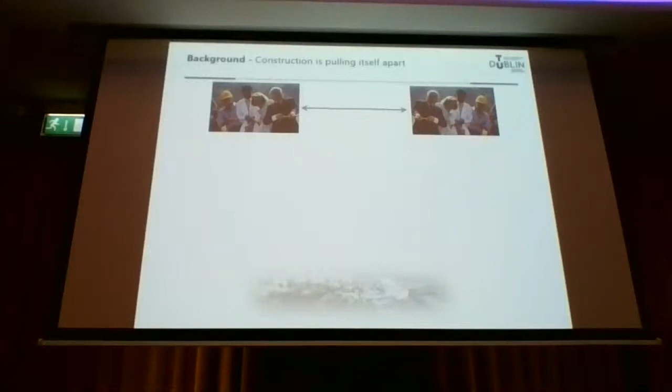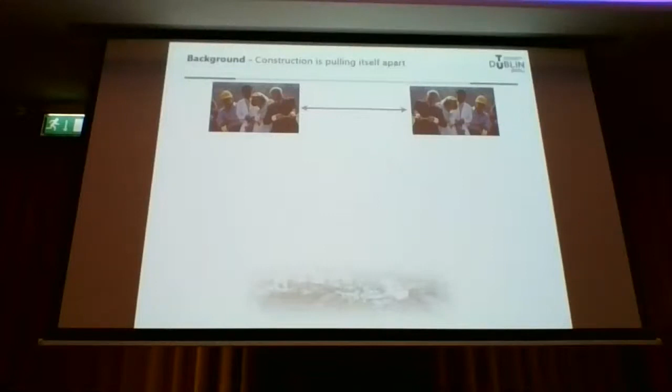So, just go through this. The first thing I would say is that construction generally has this idea, or we have this idea in construction, that it's pulling itself apart. I saw a slide last week of a number of people in a boat, and the people at the front were rowing in one direction and the people in the back were rowing in the other direction. But again, we have this with the tug of war, that it seems to be we're pulling in different directions.

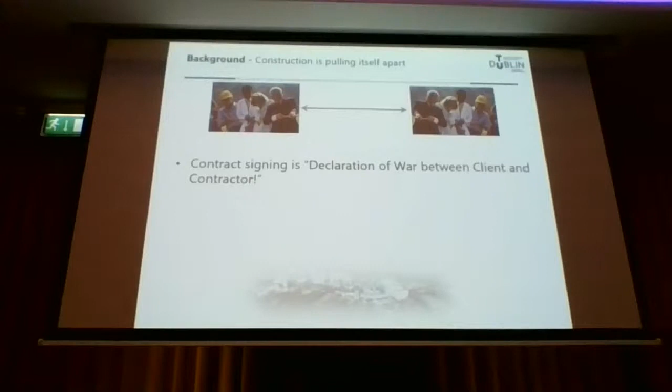And Wolfgang Breyer, who was mentioned by David Mosey earlier from Germany, has described, he's a legal person in Germany, he has described the contract signing as the declaration of war between the client and the contractor. And he said it often starts like that and it doesn't improve. And he said that's the environment that we then try to deliver our infrastructure within. So it's not a great place to start.

And part of the problem about this is that we concentrate on the contractual process rather than on the product itself. So we are always going through why we have to do things in a certain way rather than what we're producing. And I had a 30-minute discussion yesterday with somebody from a government procurement agency who I won't name.

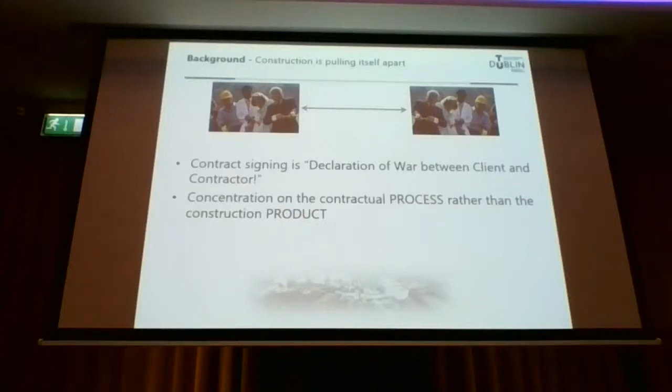It was the NDFA, who spent quite a bit of time talking about something that we couldn't do from the point of view of risk. And yet, when we looked at the issue that we were trying to solve, there was no risk. It's just they didn't want to do it because the process involved going through looking at all this risk and trying to analyse what the risk was. But yet when you looked at it, it was really a bag of smoke and there was nothing in there.

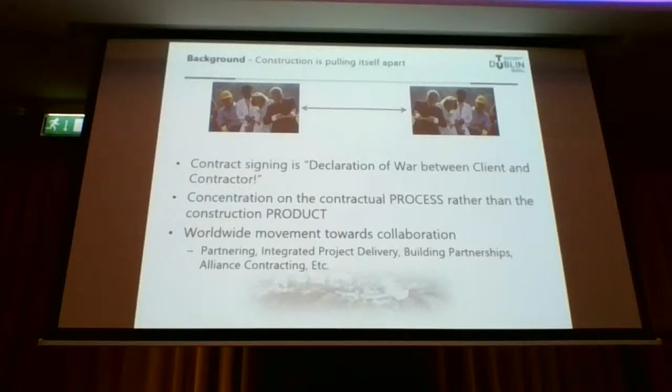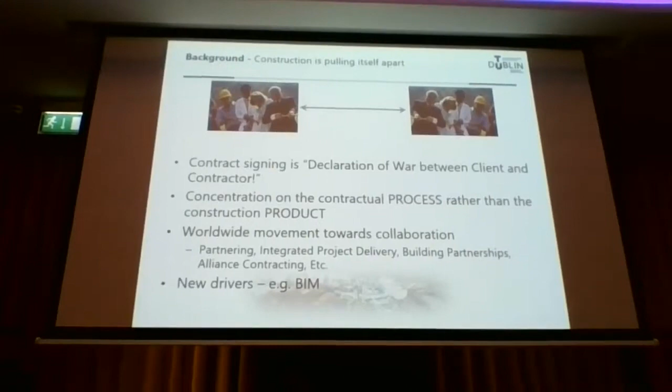There is a worldwide movement towards collaboration. You've seen this in America where you've got IPD, you've seen it in Australia, you see it in Canada, you've seen it with the work that David Mosey has done in the UK, you're seeing it now with the FAC1 being rolled out across Europe and across other parts of the world as well.

And there are other things that are causing us to do this, not just the fact that people are doing contracts in a different way. There are things that are forcing us to do this, such as BIM. And we are in a changing world, and we've got to work with that.

Now, I'm going to talk to you about a case study that we had, which we completed in 2014. And it's one which we did once, and we never did it again. And I think that's a shame. Because when you look at David Mosey's slide earlier on, 1997, with all of the problems that exist in industry, unfortunately they're still there.

CitA is here 20 years now, 20 years since last September. And it has done great work in trying to bring us on to a new way of doing things, but the problems are still there. What we have to do is we have to stop talking about it. We have to move on. We have to do things differently. Otherwise, some of you, I won't be here in 20 years' time.

I'll be well retired. But some people will be back here in this room and saying, 20 years ago we said we were going to do something and we didn't do it. So there is no better time than now. There's no right time to do anything other than right now, because it's the only time we can do anything.

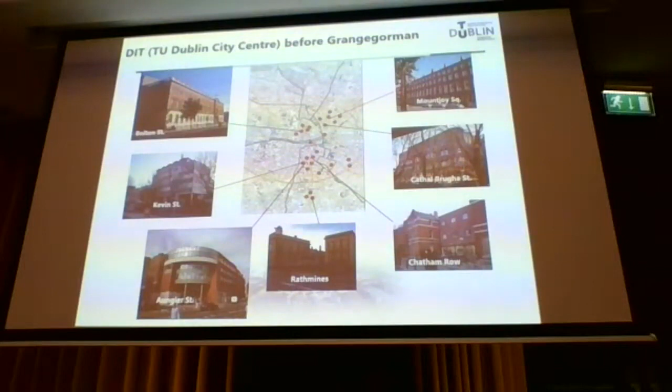Similarly, there were scientists in Kevin Street and engineers in Bolton Street, and the synergies you could get between the two, you couldn't get because you had these people in the wrong place. We also looked at the fact that in each of these buildings we had an accounts department, an exams department. Every time we opened a door we needed a security person to open it. We had different bills for electricity, telecoms, insurance and all types of things, which meant that the fragmentation across the organisation was adding enormous cost, and that was coming down to us as cost per student. We were finding our costs per student were higher than any other third level education institute in the country. We had to reduce those, and the only way we could do that is bring them all to one place.

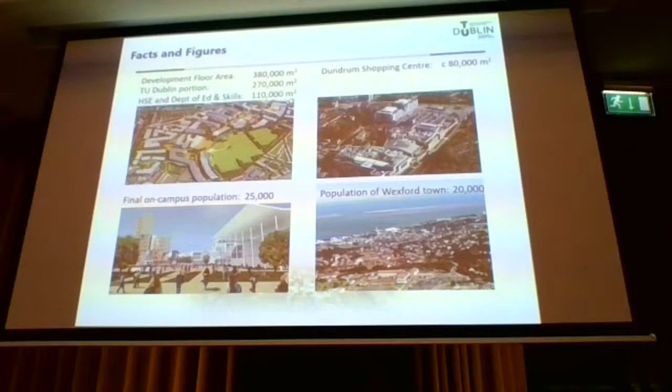The facts and figures around Grangegorman - most of you will know the Dundrum Shopping Centre, which is approximately 80,000 square metres of floor space. Grangegorman is almost 5 times that in floor space. Of that, the TU Dublin portion is 270,000 square metres, of which approximately 140,000 is learning space. The remainder is for sports, student accommodation, and other support facilities we need. The final on-campus population will be approximately 25,000 people in an area of 73 acres, 30 hectares. That's approximately 5,000 more than the town of Wexford, or Athlone, or Sligo, or Mullingar, or all these other big towns you all know about. You can imagine putting those into 73 acres. And all of that within a kilometre of the city centre of Dublin, which is astonishing that it survived the boom and wasn't covered with other development.

So that's the 380,000 square metres, and the slide also shows all the other things that need to happen. There's a primary school in there, community and residential health facilities, an industry innovation park. These were all extra things put in there because some things stayed with the HSE and some things had to stay with the Department of Education. If you look at the way this is laid out, it's divided into a number of areas.

Everything above that line is not TU Dublin. The middle bit is education, and the bit on the bottom is education support. So it's very well laid out with this master plan, which was agreed back in 2008. The overall cost is going to be approximately €1.5 billion, and that's for everything that's there, including the health facilities.

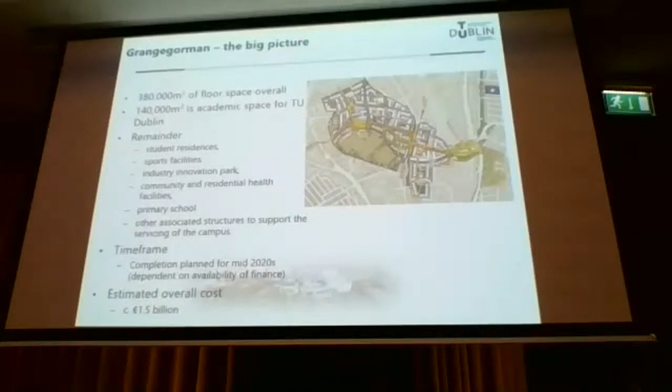It will be delivered sometime in the mid-2020s, but it depends on what you describe as mid-2020s. Our current president, David Fitzgerald, who took over in January, is going around telling everybody that Bolton Street, which is the last big block, will move in September 2025. So we are now feeling the heat on our feet again, because the flames have been brought closer to us. But that's a big challenge for us, and we've got to try to meet that.

Just to give an idea of where that is, right down in the corner, you see this is Bolton Street. So it's right beside the city centre, and to walk now from the middle of the campus, from the clock tower, down to Bolton Street is 7 or 8 minutes, depending on how fast you can walk, if you walk through King's Inns. So it really is a city centre site, and as I said, it's amazing that it has survived as long as it has.

As a brownfield site. So the SIPR works package, what exactly was it? Well, what we had to do when we were building out the entire campus, we looked at the overall size, the overall number of places we would build on this, and there were 30 building plots across the 73 acres, or 72 acres when you take into account the HSE buildings as well.

And each one of these had to be fed by a district heating system, by systems which would carry the telecoms, the water, the gas, the sewers, everything to those particular building plots. So in doing this, a package was put together which would do all of this infrastructure work, approximately 26 million euro, and involved a huge amount of work, 140 kilometres of ducting and utility services runs. Again, to put that in perspective, if you were to lay that on the M50, it would go up and down 3 times. So it's an enormous length of stuff that had to go in there.

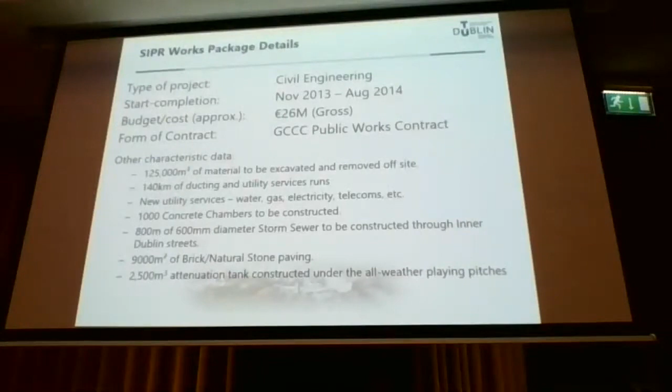Over 1,000 manholes had to go in there. 800 metres of 600 millimetre diameter storm sewer had to be put in place from the site right down to Smithfield. And that had to be done through busy Dublin streets, and that was included as part of the project as well. 9,000 square metres of paving and 2,500 cubic metres of an attenuation tank to capture the water from the hard areas, so that it wouldn't overload the sewers at a time when you would get large floods.

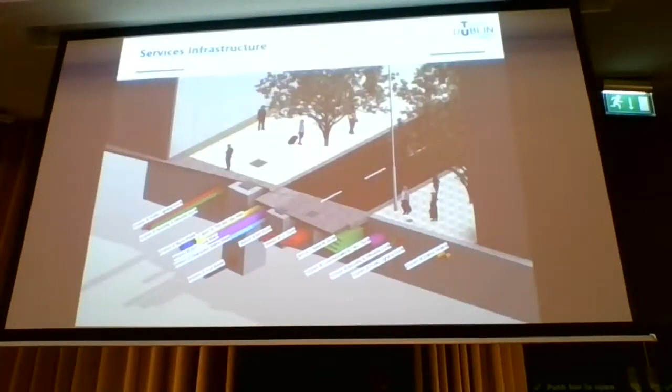So all of this had to be done between November 2013 and August 2014, because we needed the students on site on the 1st of September. So how are we going to do this? That just gives you an idea of the complexity under one part of the site. And it was just a graphic that was put together to show all of the services which would go under what's called Ivy Avenue.

Again, this is more of the energy distribution to show where the energy centre will go. You see future energy centre there. That energy centre is actually going to open for business next week. So we will have our district heating system ready to run. We'll be putting water in the pipes next week and commissioning it. And that will bring the district heating to all of the various different building plots.

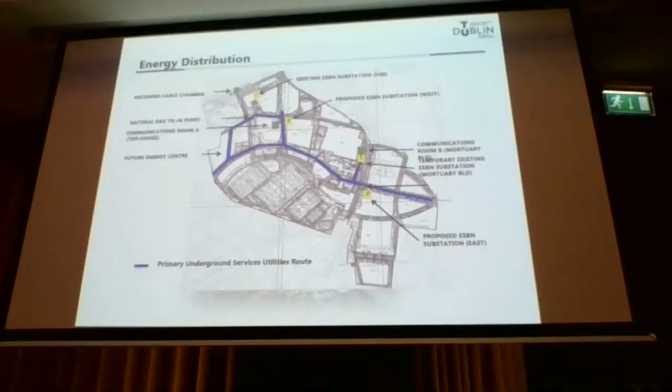But also we had to work out how do the telecoms come in? Where do we get our internet connections? Where do we have our substations for power? And all of that was worked out so that we have this plug and play now. You start in a particular site, a particular building plot. Everything you need is right beside you. So we don't have to go digging it up all the way back to the road in order to connect up to everything.

The main people who were involved, the Grangegorman Development Agency, was the organisation in charge of delivering the project. So they were overseeing the design, they were making sure that we got through procurement, and making sure that we managed the project and closed out the project at the end.

The architects were MRY, the lead engineering organisation was O'Connor Sutton Cronin, the local architect DMOD, and so on with the landscape architect. The contractor was Roadbridge, and the end users were those on site: ourselves, TU Dublin, HSE, the Department of Education and Skills who have a primary school on the site, but also all of the local people who we see as stakeholders involved in this.

So in order to get this to work, we realised we have a certain amount of money, a limited amount of time, and a huge deadline on the 1st of September that has to be met. It's not negotiable. We just can't do anything else.

So Michael Hand, who was the GDA CEO at the time, brought together all of the people involved in the project at a management level, and all their supervisors right down to their site foreman. He knew most of the principals - he'd worked with the contractors before, with O'Connor Sutton Cronin before, with the architects before - and he used the power of his own personality to bring these people together and say, we need to get this done, but we cannot do this if we fight with each other. We can only do this if we collaborate.

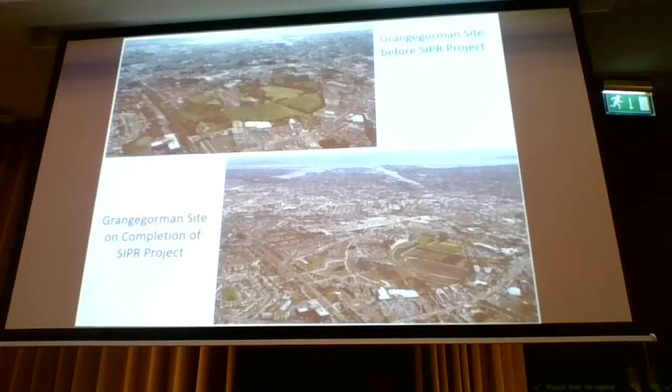If you just look at the two photographs there, one was before the project, the other after. I know one is a bit further away, but you can see there's quite a change in the area, and if you look at it now, it's even more so. Between November 2013 and August 2014, you can see a radical change around the area just at the entrance to the project.

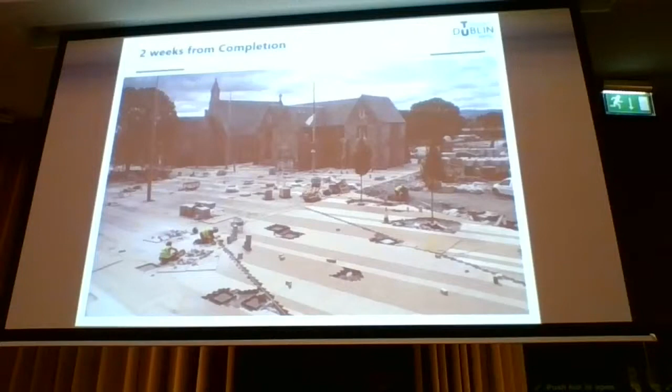You can also see where another project started up in the background there, which is the Greenway Hub project, which was not included in the original site infrastructure and public realm project, but again was a very successful project on the site.

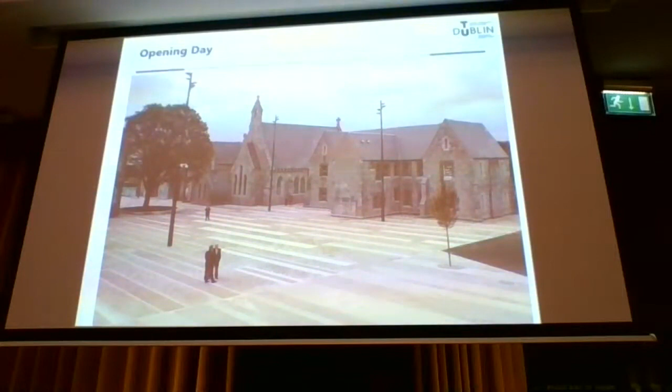Two weeks before completion, it looked a bit like a bomb hit it, but 8 o'clock the morning of the 1st of September 2014, that was the scene, and that's when that photograph was taken. I was told the last brick was laid just after 7 o'clock that morning. The contractors actually worked all weekend to get it finished.

So the outcome was, we first of all had to hit the power-on target date, which was in late May 2014. We hit that on time. We achieved the opening and got 1,000 students there by the 1st of September. The quality was never compromised.

This was an issue which Michael Hand always said: it's as easy to do good design as it is to do bad design, and in fact, if you do good design, it ends up being cheaper. The contractor achieved their financial targets, and everybody emerged from this with their professional reputations very much intact, because they ended up getting an award for this.

The International Construction Project Management Association has an award every year for alliance contracting, and this one won the award in 2015, which is the only one that has ever been won in Ireland.